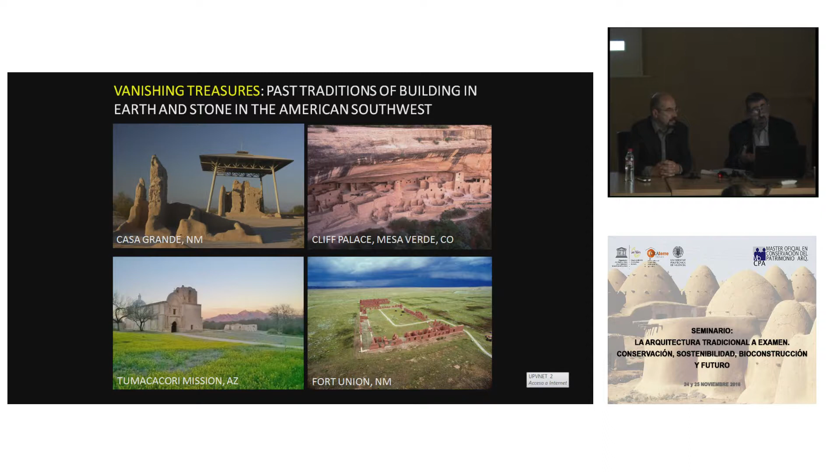And of course, these are interesting because they're not pure forms translated. They are syncretic. They take advantage of indigenous and imported traditions together, so they're new.

They are a hybrid. And it is this fact, this hybridity, that I would like to discuss as a spectacular failure.

So today, there is much romanticism and mythology of earthen construction in the United States, but we do have at least two traditions.

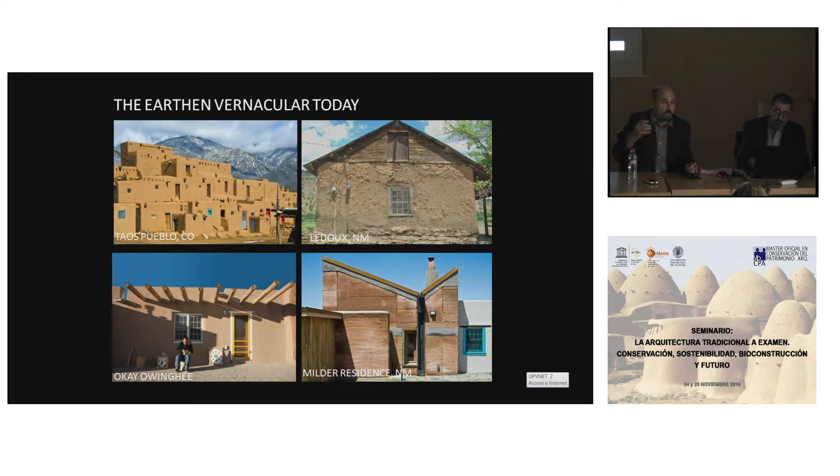So the question that I think we've been contemplating for these 2 days is why preserve these earthen and stone buildings in terms of their past knowledge that they incorporate, the practices they incorporate.

I think that's a good reason.

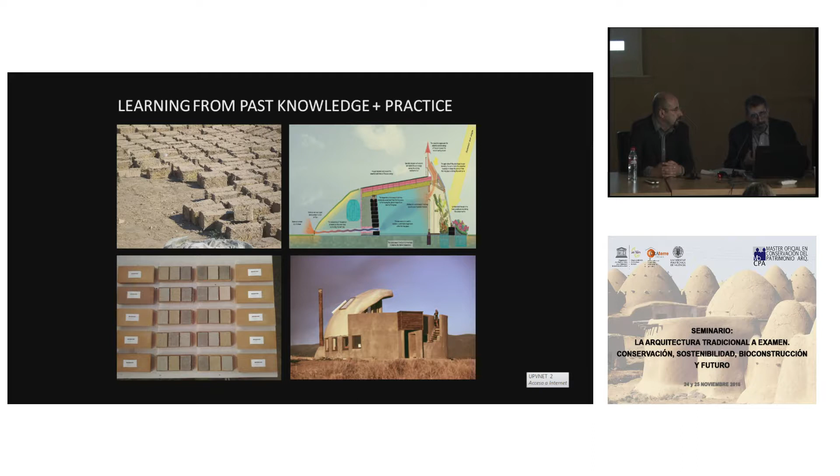So all of these experiences, all of these traditions have been developing over the past 30, 40 years with the assumption that the climate would be what it is.

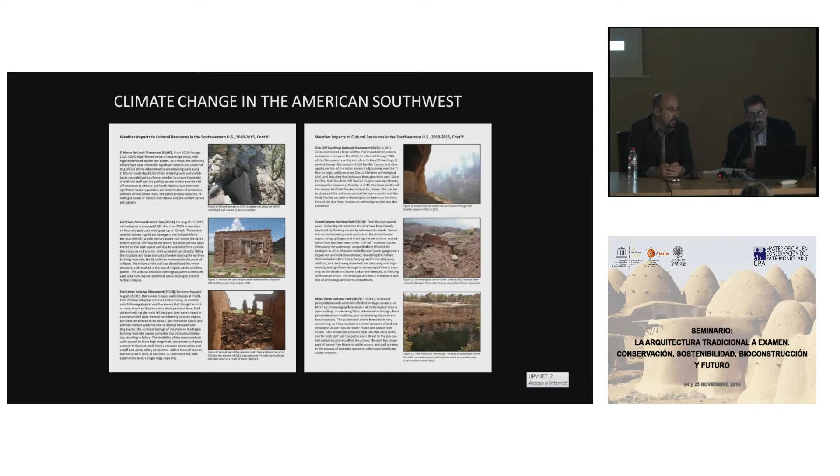Okay. So, last year, I began a research project at the request of the National Park Service to look at the effects of climate change on earthen cultural heritage.

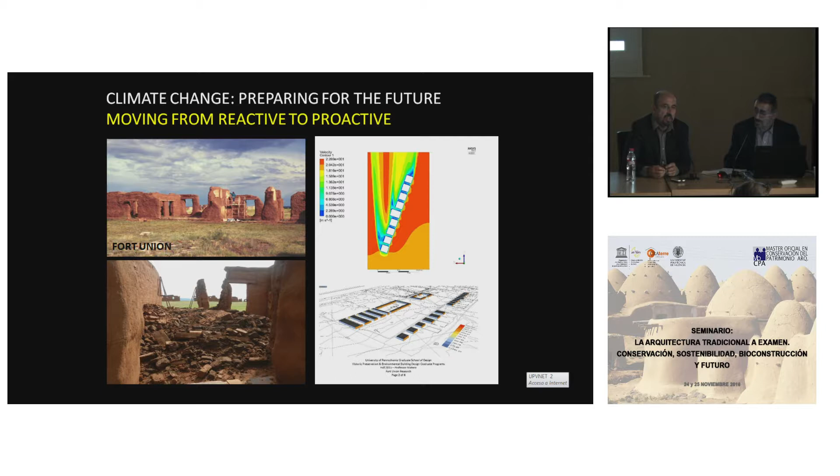So if we can understand and predict which walls, which buildings might be more at risk due to a hierarchy of factors, we can be more effective in our response to conservation.

The National Park Service has a program dedicated to traditional or vernacular architecture in the West called Vanishing Treasures.

Perhaps during the questions we can get into debate as to what's traditional and what's vernacular, but the point is these are local buildings made of local materials, though historically they are the result of mixed traditions.

So we identified three issues: we need to compile existing data through climate modeling, identify the parameters that are most destructive in this environment to the buildings, and prepare climate models and projections for the future.

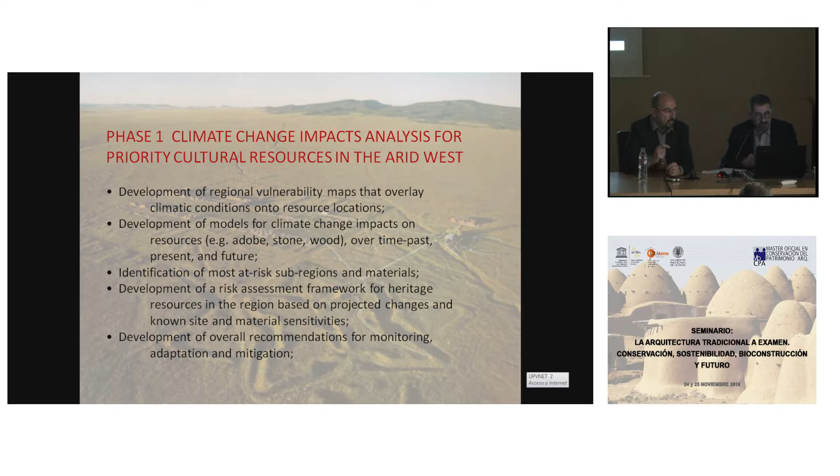And then most importantly, not to stop the work, but to continue the monitoring, the implementations, and then the re-examination of the implementation over time.

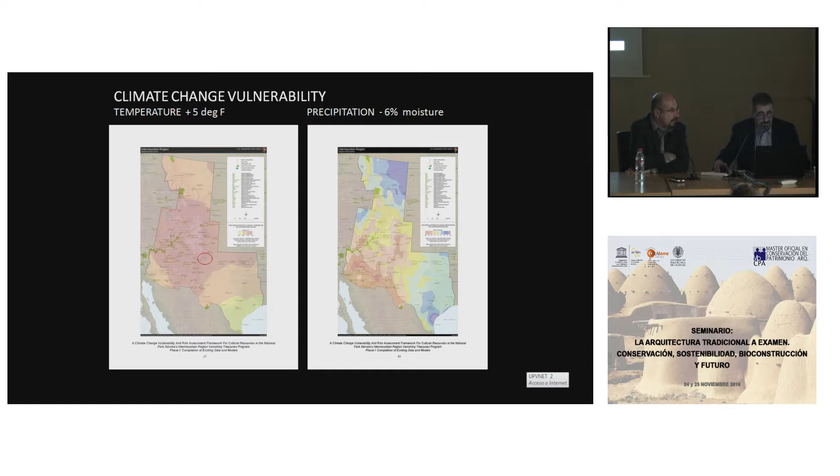Let me go back. But the climate may be changing, while the sites are fixed. They are where they are, and they will be vulnerable to these changes. So we need to develop responses to understand how they will be affected, what we call their risk vulnerabilities.

So we could look at many traditions, stone, wood, earth, but for me, earth is the most sensitive. In English we say it's the canary in the coal mine. You know that expression? Yes.

So the primary factor, you know, when you think climate change, the first thing, at least in the United States, is we worry about rising sea level. It is getting all the attention, right? And it's real, it's true.

But there are other phenomena that will occur that are just as dangerous and deadly for these kinds of resources. Hotter temperatures and drier seasons mean more intense storms that deliver more water in a short period of time. And for adobe, this is a problem.

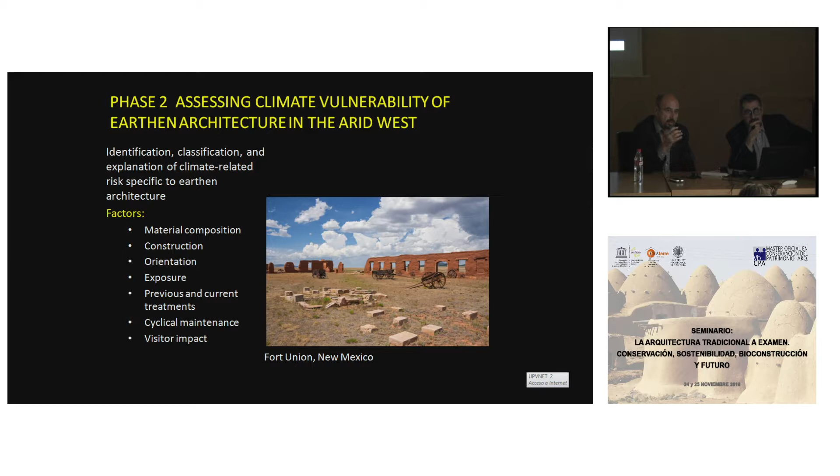And it's actually in a ruin that we can see all these variables and tease them apart one by one, and test the hypothesis of the hierarchy.

So let me introduce you to Fort Union.

It was the largest military fort west of the Mississippi in the western United States. It was constructed in 3 phases from 1851 to 1891.

The first fort was here. The second fort was here. And the third fort, the largest, is here.

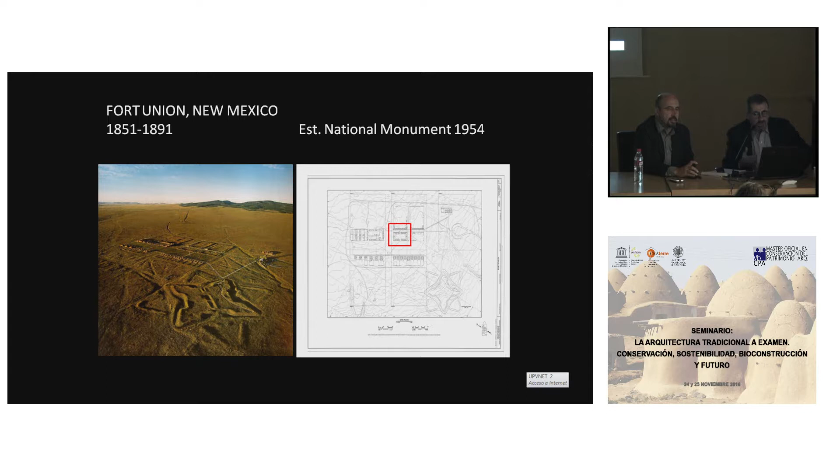Today, it is the largest adobe ruin in North America. So we have an enormous database to test our hypotheses.

The questions we hope to answer can be grouped into 3 groups: environmental, pathological or pathologies, and the effect of past and current intervention.

We have temperature and precipitation data every day since 1851. So this is a data set one rarely has for an environment.

But what we don't know is how did that climate affect the buildings over time.

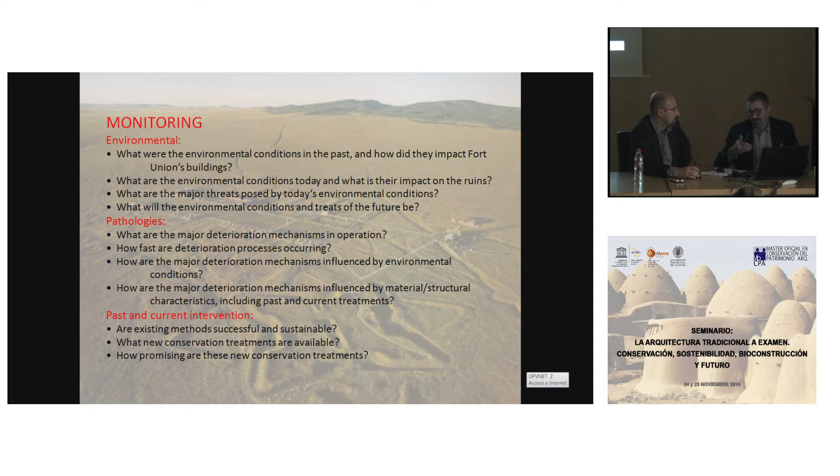Because this is the only way we can go forward managing the site if we understand the differences in the threats. Porque esa es la única manera que tenemos para ver cómo va a evolucionar el tiempo, analizando las diferencias entre las amenazas, en diversas amenazas.

So, what I don't have time to discuss is that there is also an incredible record of all the treatments that were done here, many with chemical treatments. If you're interested in the history of conservation, there is a remarkable record of the attempts to stabilize an earthen ruin, which is like rearranging the deck chairs on the Titanic. Lo que no tiene tiempo ahora de explicar con detalle, es que existe toda una historia muy interesante de diferentes tratamientos para consolidar la ruina de adobe, y que ha hecho una especie de comparación, sería casi como enderezar el casco abollado del Titanic.

We are doomed to fail. Sí, o sea, que vamos a fallar seguro. So we need to take a different approach. We need to be proactive, preventive. Tenemos que ser más bien proactivos, no coger la misma aproximación de ir probando tratamientos, sino ser proactivos. Before the damage happens, antes de que el daño ocurra, si no, no conseguimos enderezar el Titanic.

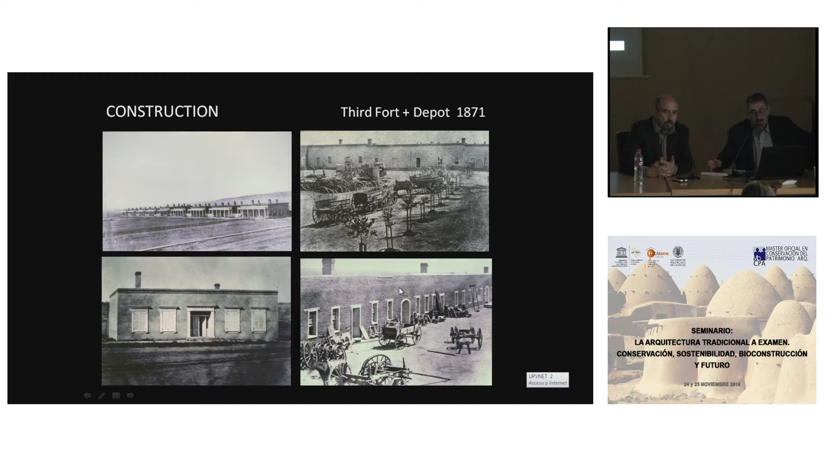The plasters that were used to protect the adobes fell off within 2 years. Sí, los enlucidos cayeron en 2 años. And the roofs and walls separated. Y los tejados y los muros se empezaron a separar.

The one building that performed much better was the hospital with a gable roof. El que mejor funcionó fue el hospital con un tejado de doble vertiente, de 2 aguas. With wood shingles that absorbed the water and then evaporated it away. Con ripias de madera que absorbían en parte el agua que caía y luego la soltaban.

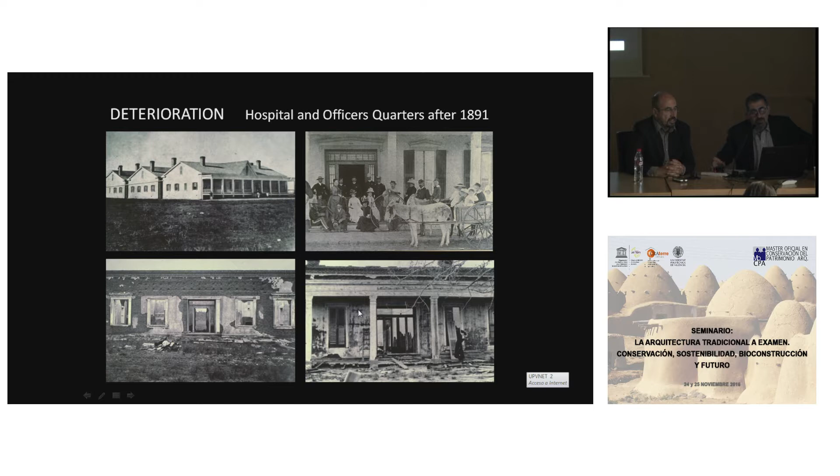And so here we have a remarkable set of photos showing the hospital in its decay after 1891. Aquí tenemos una serie de fotos interesantísimas en las cuales se ve un poco la evolución después de 1891.

So in 1954, the National Park Service decided that this site would become a national monument. En 1954 el Servicio de Parques Nacionales decidió proteger este fuerte. And we have all the archaeological and conservation notebooks of all the treatments, everything that was done as part of the history of this site, y tenemos toda la historia, anotaciones de todos los tratamientos que se hicieron arqueológicos sobre estas ruinas en estos tiempos, including things like structural reinforcement and chemical consolidation.

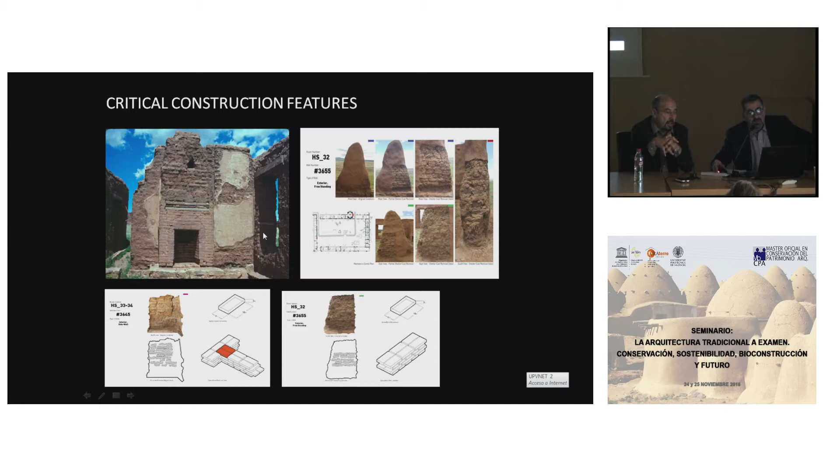So in order to survey, you saw how large the site is—it's enormous. We developed a rapid assessment survey of critical attributes that define the success or failure of a wall at meso and macro scale.

There are over 100,000 square feet of wall surface. I won't go through all these, but you can see wall profile, out-of-plane deformation, shape or contour, and the configuration of walls—bonded or not bonded.

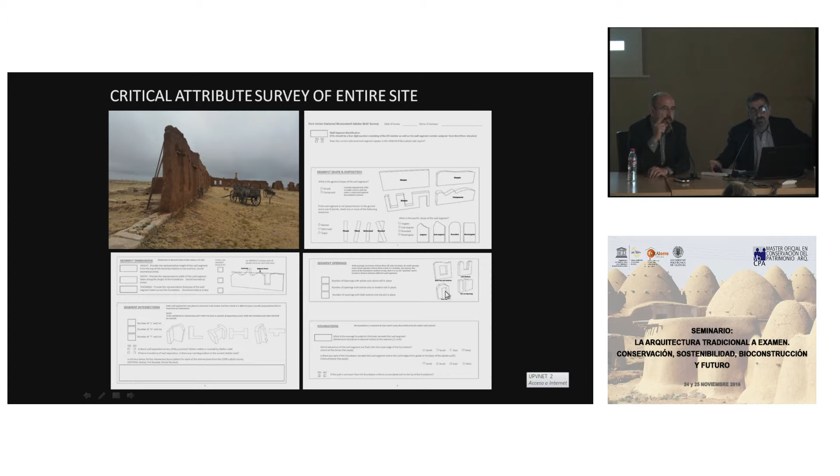And then other information regarding past treatment—chemical treatments in the past—and very important, the presence of openings.

Okay, so we talked about the weather, the construction. The adobes have been analyzed—they're perfectly good materials, proper grain size distribution, good clay in the composition, exposure, construction, treatment. We're looking at all these things.

To understand why some walls are standing and some walls are not. It seems obvious, but it's not.

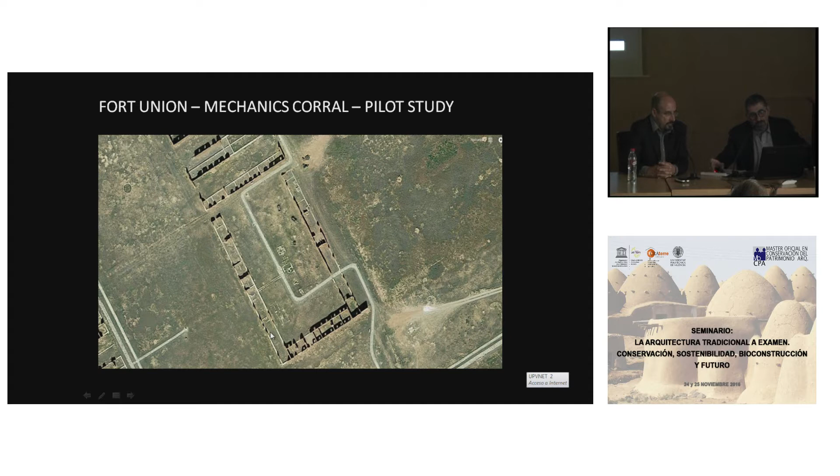So we have decided to look in detail at one quarter of the fort, the mechanics corral.

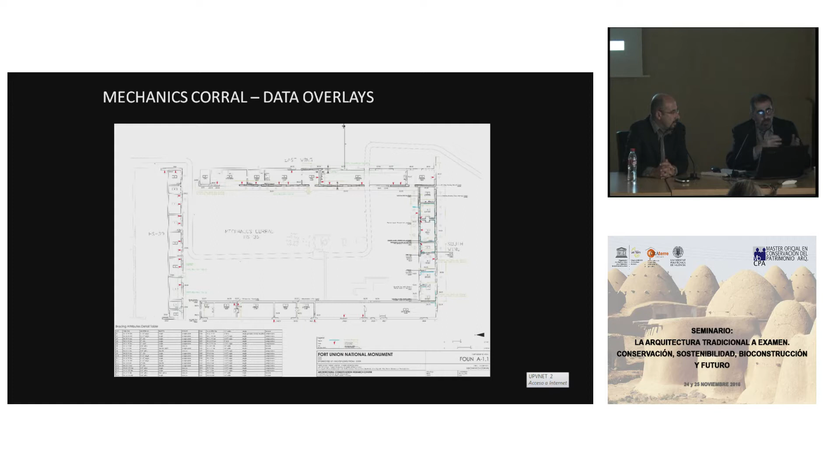We've begun in a GIS to layer all the information so we can later do regression analysis, to look at predictive modeling of what combination of factors are found here versus there. Why is this group of walls standing and this one not? It's exactly the same exposure, exactly the same construction.

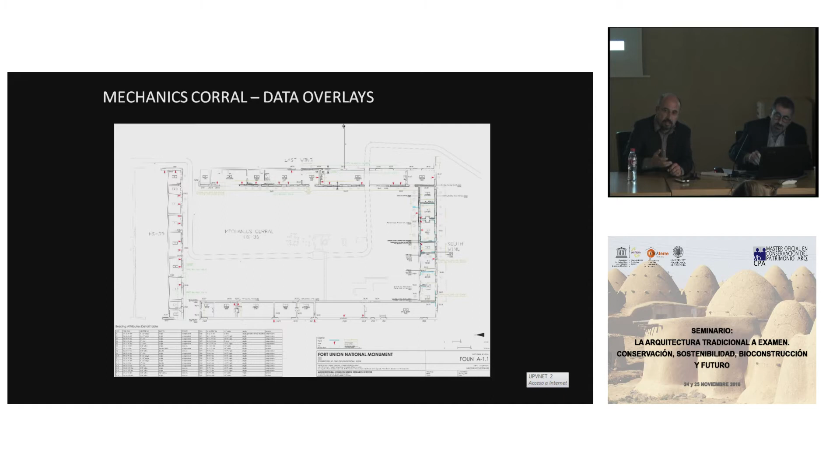So we don't do this enough. We need to think about the hypothetical life cycle analysis of our buildings. We do it today on contemporary construction, but we don't necessarily think about it in terms of historic buildings, their past history to the present.

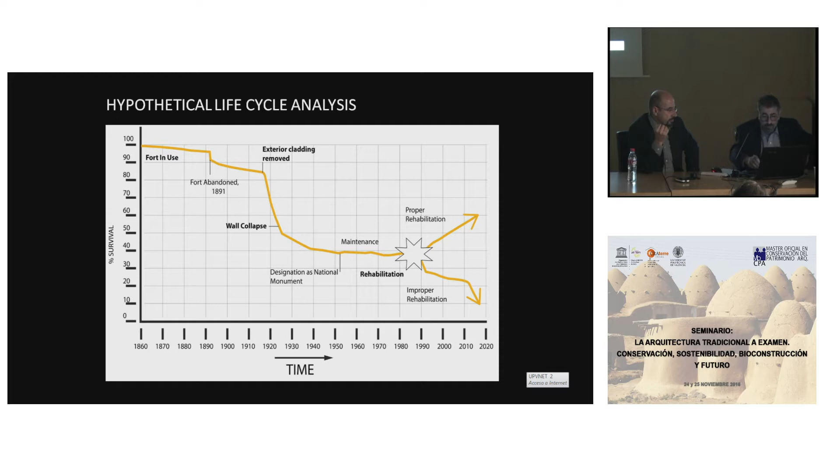Good. So in the past, I was involved in this a long time ago. We thought about how we might set up monitoring points topographically on the wall and in terms of profile.

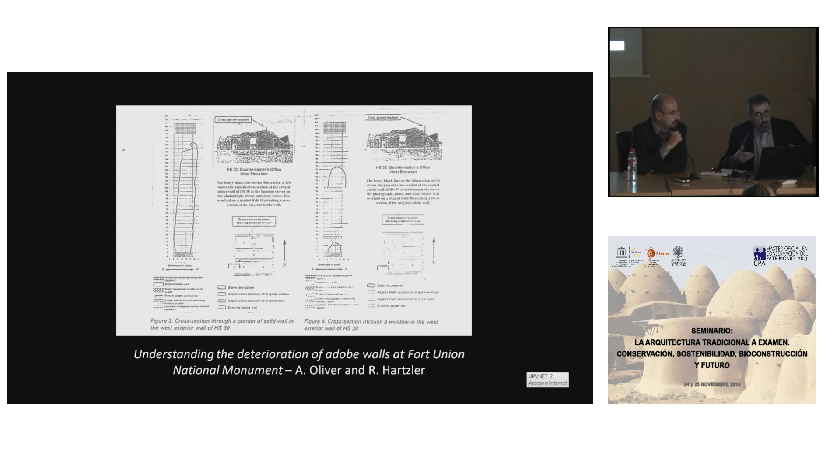So in thinking about this, and this gets back to Grazia's lecture yesterday, you have to know what you want, what your objectives are, to pick the correct tool. You don't reach for the most expensive, high-tech tool. You choose the tool that will do the job. Not only now, but also if it's to be put in the hands of the managers, can they use that tool? Remember, monitoring is the long term, not the short term. So we have to think about the sustainability of the data and the continual recollection of the data.

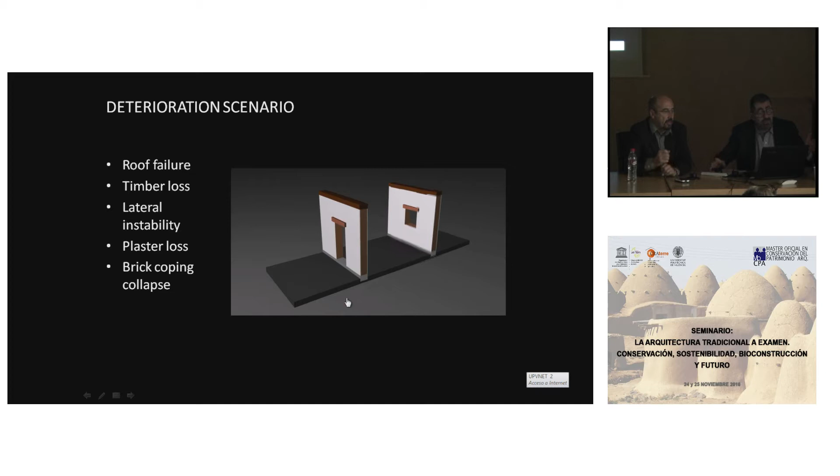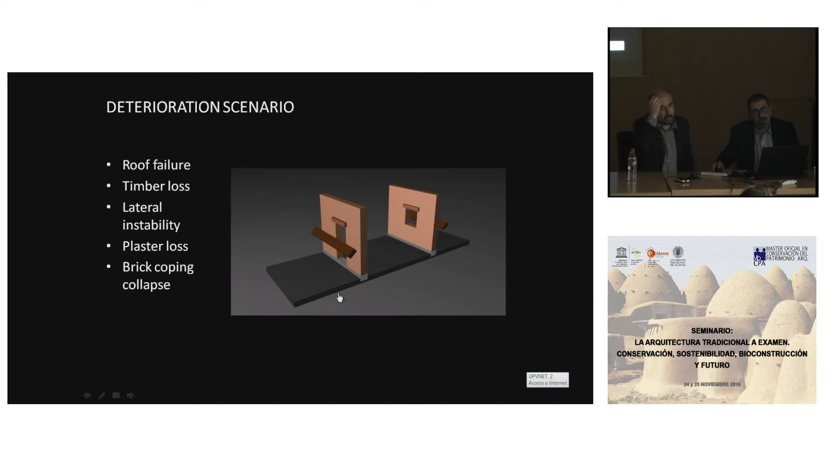To show the stewards decay scenarios and work this out for ourselves, we made simple animations: the roof disappears, the vigas disappear, now the walls have no bracing and are exposed, the brick parapet falls down, and that's it.

So in thinking about how these walls become wall fragments, the question was how best to do the monitoring. We wanted to compare very low-tech to very high-tech methods, because the question is what resolution, what do we actually need to know. We did two checks, one with advanced technology and one very homemade, to see what we'd really need.

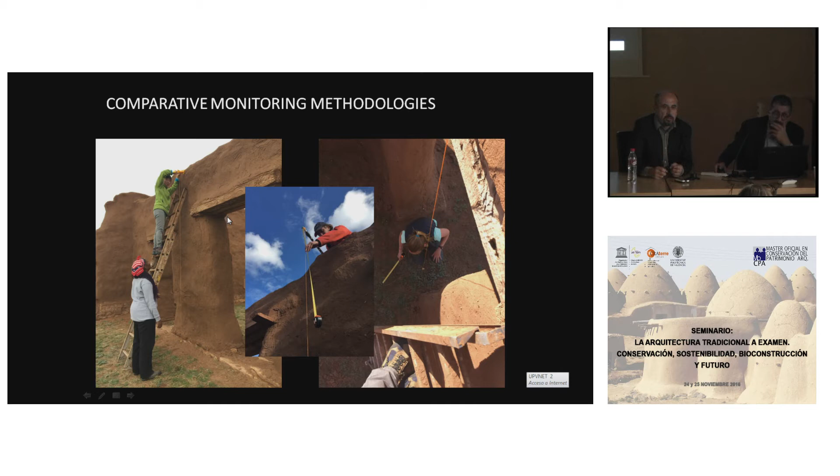So we did very traditional methods with a plumb bob and a ruler, very simple things, because this is probably what the stewards will have to do over the years to maintain the site day to day.

This is important because it's not about sub-millimeter change on the surface. It's about the fact that wall profiles become increasingly vulnerable as they change. If we understand the typology of wall profiles, we might understand which are more at risk because of their profile and their lean—two factors that put certain walls at greater risk than others. It's not about laser scanning them, but about understanding the relationship between stability of profile, deformation, and orientation.

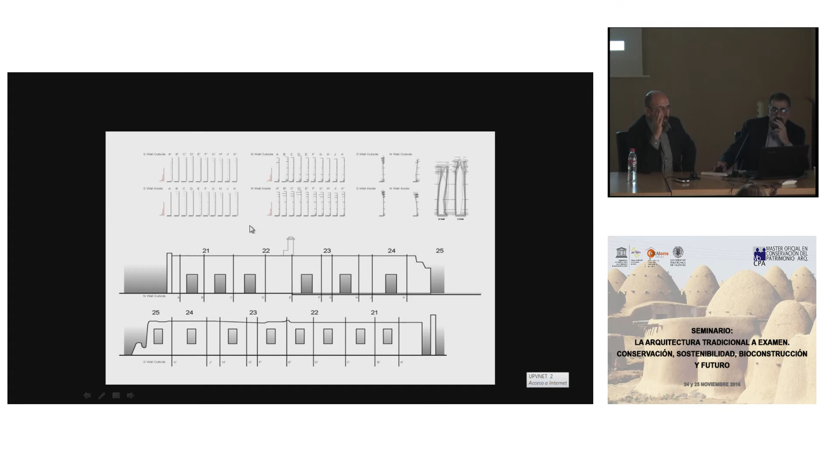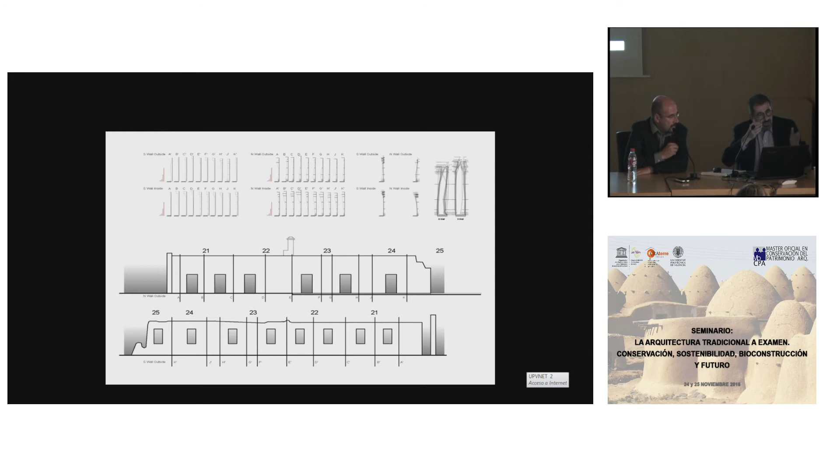These are all the profile analyses superimposed, taken across the wall. This was a quick way for us to get a better understanding, in a continuous wall, of the incredible variability of wall thickness and shape very quickly.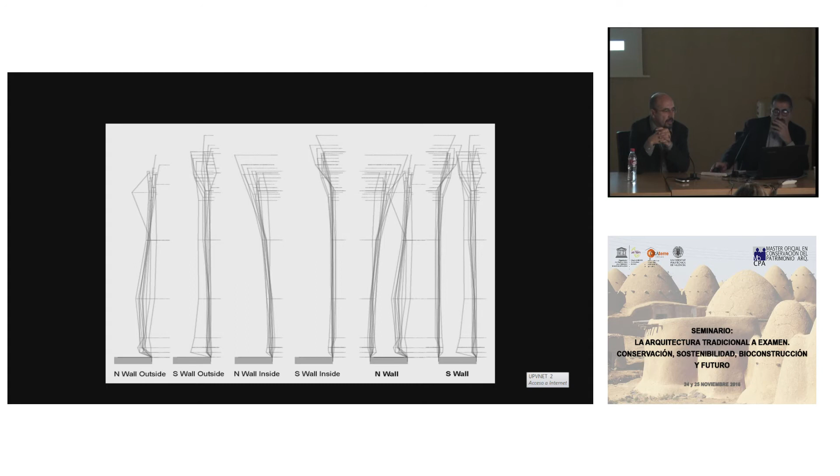You heard yesterday that 14 days of field time can equal 8 months of post-processing. So we wanted an understanding of trends and patterns so we could pick which walls to scan for a monitoring program—since with that ratio of two weeks of work site to eight months of office work, we needed to distinguish quickly which walls were worth scanning.

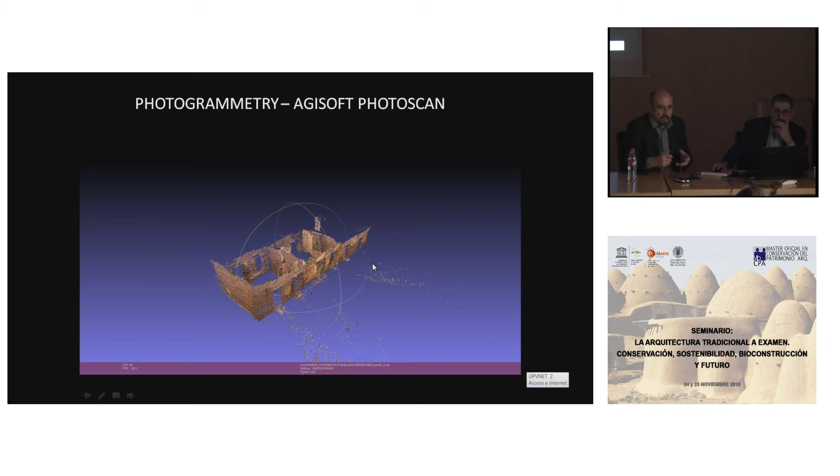We also looked at accessible photogrammetric software like Agisoft, taking photographs and putting them into a point cloud to quickly reference different aspects of the walls, bringing us back to that rapid assessment survey, and to build these 3D models—though we won't go into detail on that.

What are the environmental factors at play here? One thing nobody considered, because no one is ever there in winter, is snow. Snow is a great reservoir of accumulated moisture. If temperatures get warmer there are more freeze-thaw cycles, delivering much more water over the winter than if the snow stays frozen the whole period.

Bueno, uno de los factores que no se tiene en cuenta es la nieve, que es una gran reserva de agua que digamos es mucho menos dañina, porque allí normalmente la gente no está en invierno, pero es mucho menos dañina ahí al pie del muro que si de repente desaparece la nieve y llueve más intensamente, porque esta lluvia va a afectar mucho más que la nieve.

So if we understand, for example, that the damage we see related to the wall heights here are a function of melting snow in the spring, and we understand that this wall might protect that wall with the climate models, we can begin to make a more nuanced understanding of what we all know in this room is damage from capillary rise, but it's a very particular kind of damage related to snow duration and exposure.

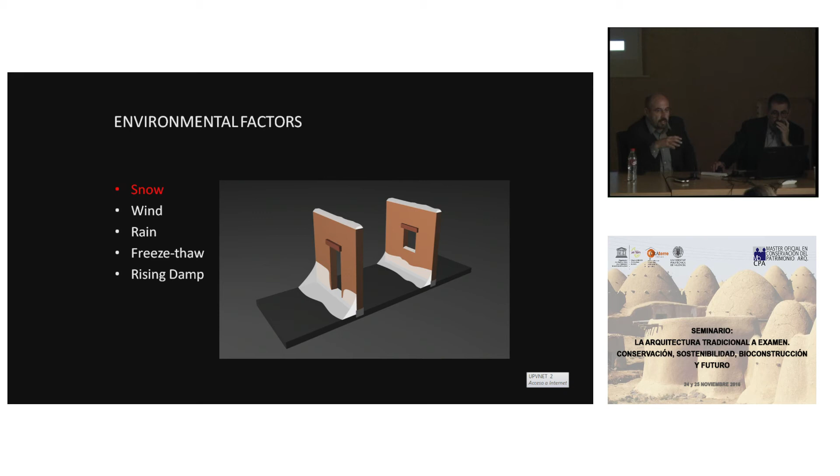One factor we did not consider seriously was wind. The weather models show that wind is an incredibly important vector in deterioration. Y lo que no consideramos muchas veces es el viento y, sin embargo, los modelos de tiempo atmosférico demuestran que el viento es uno de los factores más importantes en el deterioro.

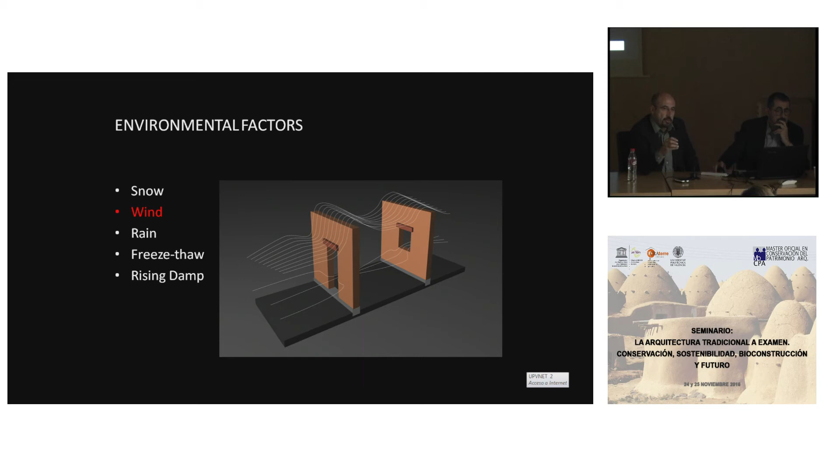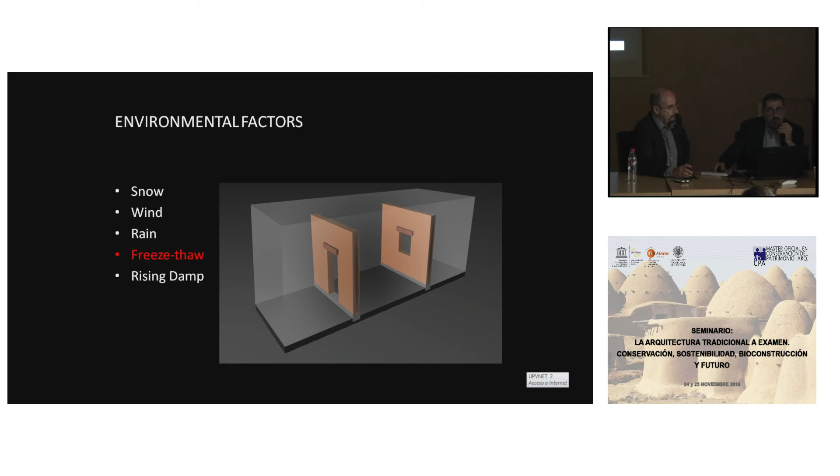Of course, rain, por supuesto, pero menos ahora. Freeze thaw, very important, el hielo-deshielo. And of course, rising damp, y por supuesto, la capilaridad.

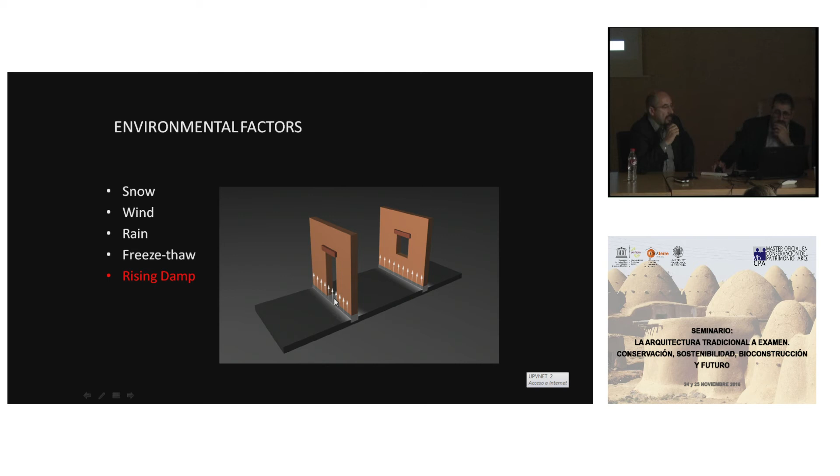But the one good design factor here was they put all the adobes on high stone foundations. Pero la buena cosa del diseño es que pusieron unos zócalos de piedra.

So in thinking about these individual decay mechanisms, basal erosion, coving, deformation, leaning, we know these things from the literature on earthen architecture.

Let's see if I can get this to work. No funciona. It was working before. It's slow, eh? You have to be patient.

Okay, so coving, aquí está basal erosion, cómo se hincha, la degradación en el basamento. Wall, out of plane wall deformation, la salida de plano de los muros.

It'll do it in a minute. Here we go, it's better on my computer. And then the walls lean and twist.

Remember, they have no lateral bracing from the original construction. Después también se inclinan. Y recordar, no tienen ningún atado, han desaparecido las vigas, entonces no están atados.

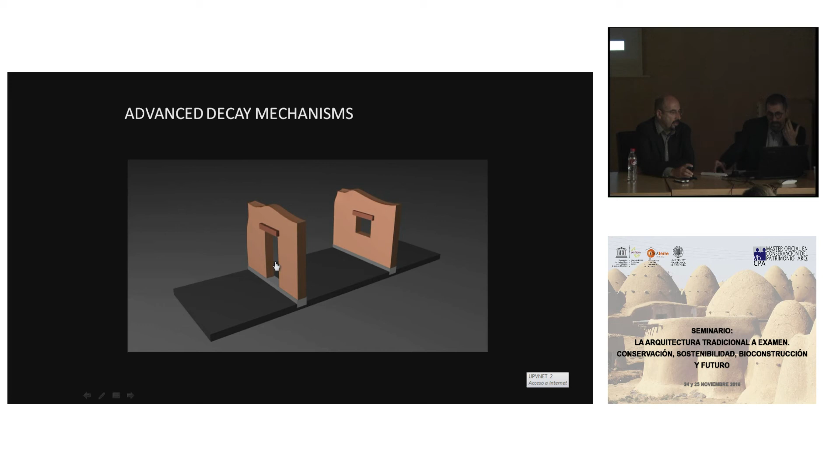And of course, the more advanced decay mechanisms, and this is where openings become very significant. We see the profile deformation when we get this kind of deformation with an asymmetrical angle, we get this kind of failure. Y aquí vamos a ver cómo se puede deformar, y la peor cosa que puede pasar es cuando las crestas se vuelven muy empinadas porque la degradación se acelera mucho.

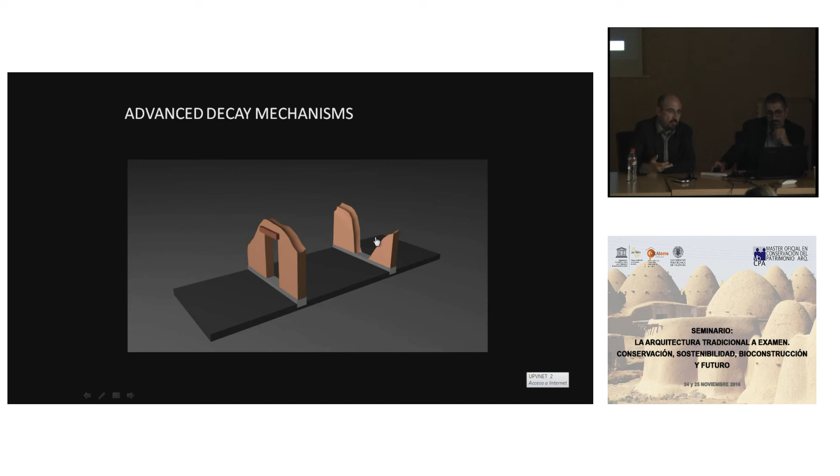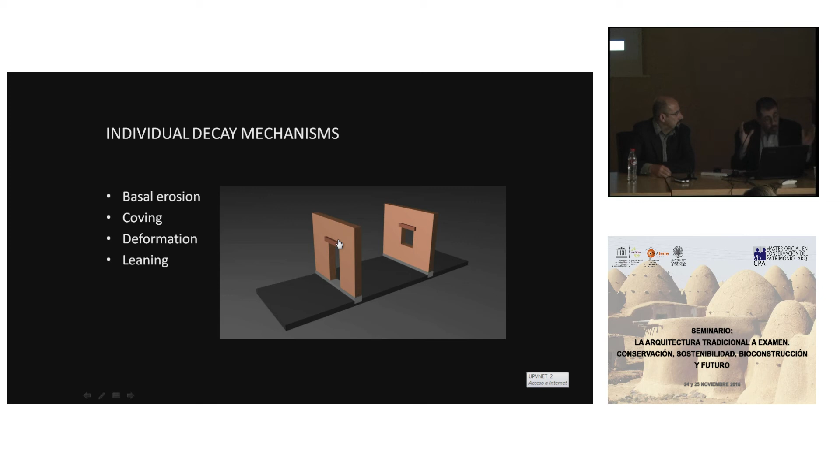What's very important, what the model shows us, is that it's very important to keep this structural feature, to keep the adobe above the openings, because they are the buffer for the creation of two walls out of one wall. Y lo que es muy importante es mantener los adobes encima de los dinteles, porque es el punto clave para que sea un único muro y que no se divida en dos, que no se trocee en dos.

So, again, these are intuitive, but the problem is we have a multivariable equation. The materials are fine, construction is consistently predictably bad, but we have exposure, orientation, some walls sheltering other walls. We need to put this into a spatial analysis so that we can begin to understand which walls are more at risk than others.

Bueno, tenemos el cuadro de situaciones: tenemos unos adobes bien compuestos, tenemos una construcción previsible, bien hecha o mal hecha, pero previsible, depende de los casos, y luego tenemos los factores de orientación, tenemos factores de exposición, etcétera, y tenemos los factores de protección de unos muros que protegen a otros muros.